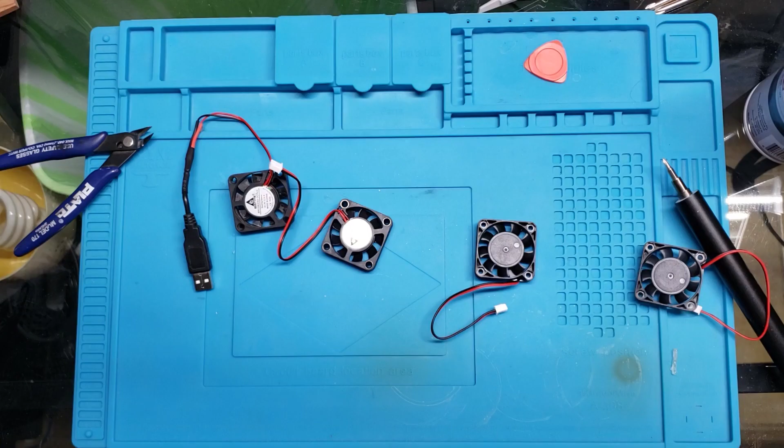So I was rummaging around in a drawer the other day and I found these fans, and I thought to myself, these would be absolutely perfect for cooling the top of my laptop. So I think if I 3D print some kind of mount for these, it would do a suitable job at reducing the temperature on that. So that's what our project will be for today.

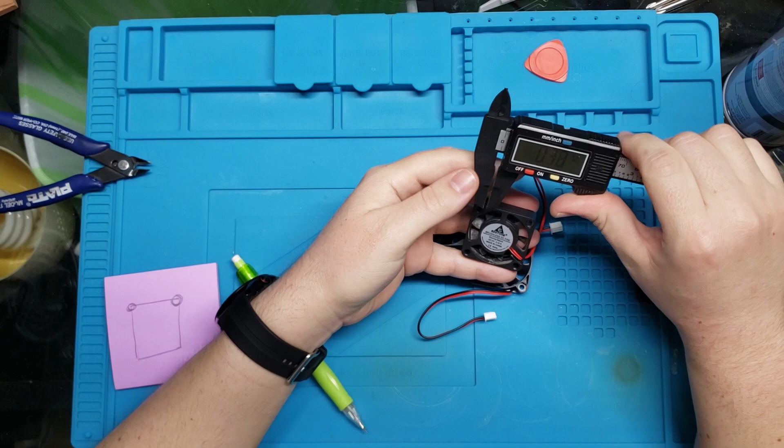Alright, so let's go ahead and start with the measurements. Width and height should be the same. We're concerned about the dimension, the size of the hole, and the distance of the two holes from each other. So, bad engineer. This is set into inches. Let's go ahead and set that to millimeters and zero that out.

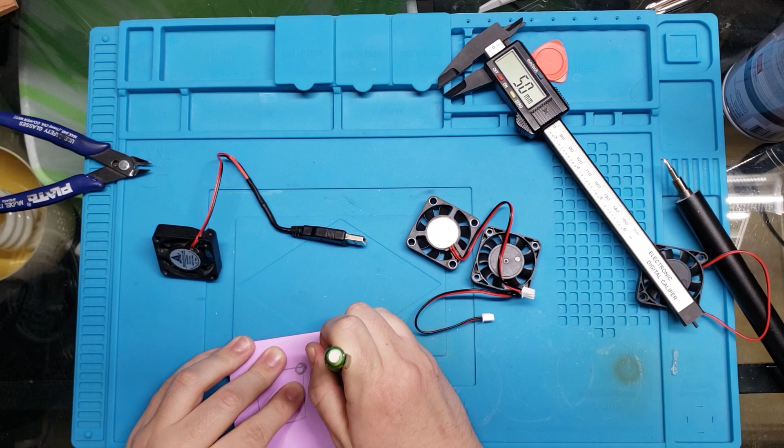See, what we can do is measure the distance from the edges of the circles, which comes out to roughly 28.3. And then we can measure the size of the circle, like so, and that comes out to roughly 3.1. I think a safe number is 28.5. 39.8, these are 40 millimeter fans. Alright, now we're ready for Fusion 360, so let's hop on over there.

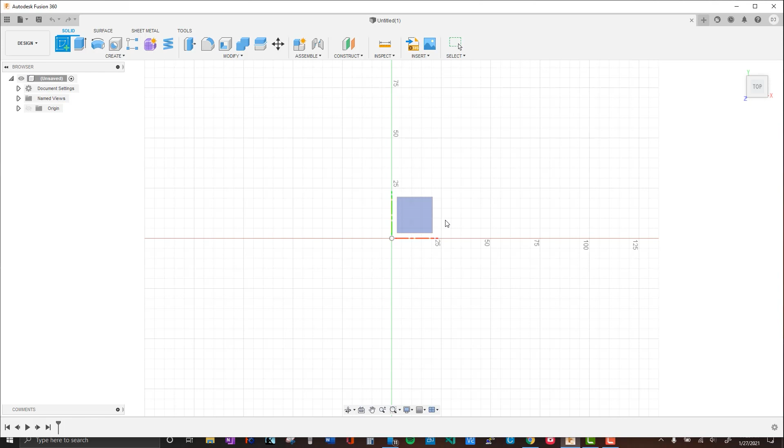We're going to get a top-down view and we're going to create a new sketch. We'll select our plane there. And now we're going to start by creating a small line connected to a larger line connected to a smaller line. This first small line will be 3.1 millimeters divided by 2. Let's zoom in a little bit.

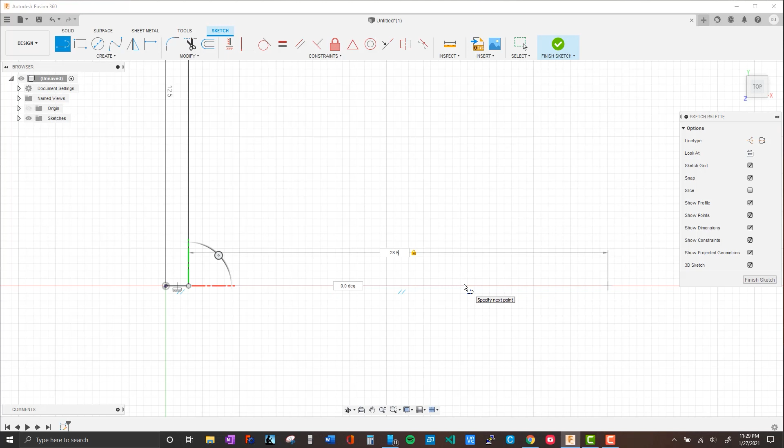Alright, now our next line will be connected to the end of that, and that will be the 28.5 millimeters we measured earlier, and then we'll repeat that same small line here. That is 3.1 divided by 2, because I'm too lazy to do math. And now we can create our circles. So, 1. The center of each circle will go at the end of all of the lines, if that makes sense. So that is our circle.

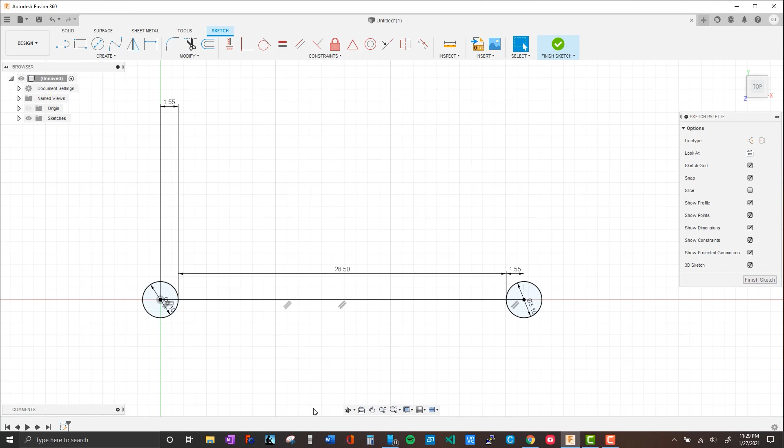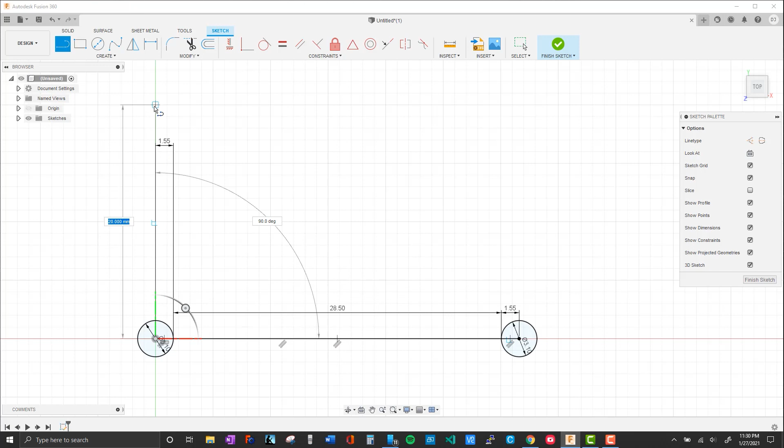We can now do the same thing in the height direction, or technically the y direction. So let's measure the overall length here, because we don't need to do that since we already have a circle here. So we'll just pretend like we're creating another line. We'll measure from one center point to another, that's 31.6, and then we'll do that in the y direction, so 31.6. And then we'll go ahead and do that again for the fourth and final circle. 31.6. Awesome.

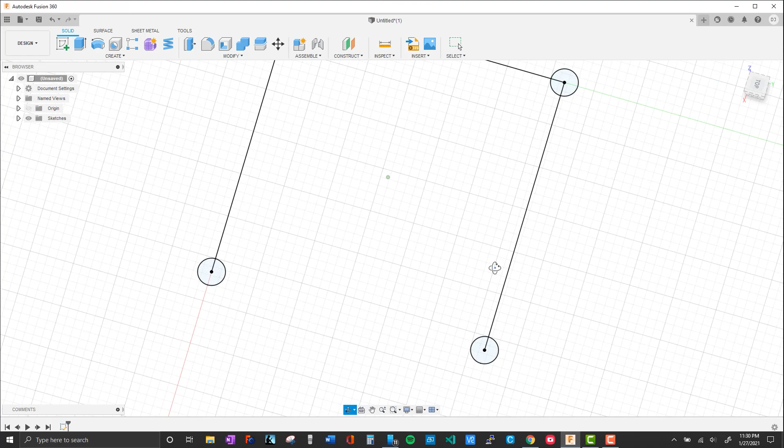So now let's create some circles there. 3.1 and 3.1. We'll hit finish sketch at this point, and we can go ahead and extrude our circles. So we'll hit E first. Now I can select all the faces that I want to extrude. And then let's just drag that up about 2 millimeters.

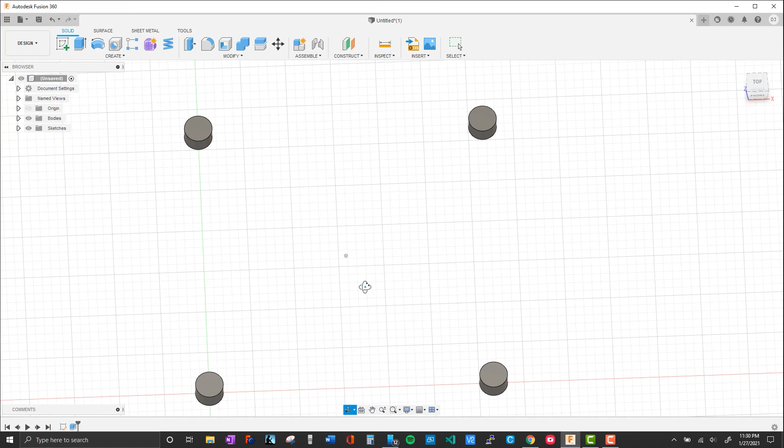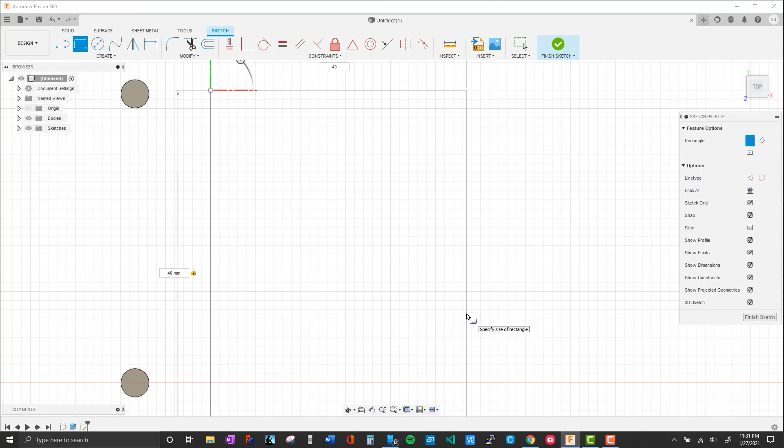Now that we have that, we're going to create a centering line, and we're going to create the outer box of the fan. So let's go ahead and go top down, create a sketch, and this sketch we're going to make a rectangle, so we can just type R and click anywhere. And then this is going to be 40 by 40, because that was the size of the fan itself. Now we'll extrude that about 1 millimeter. We just really need the dimensions to play around with spacing and stuff like that.

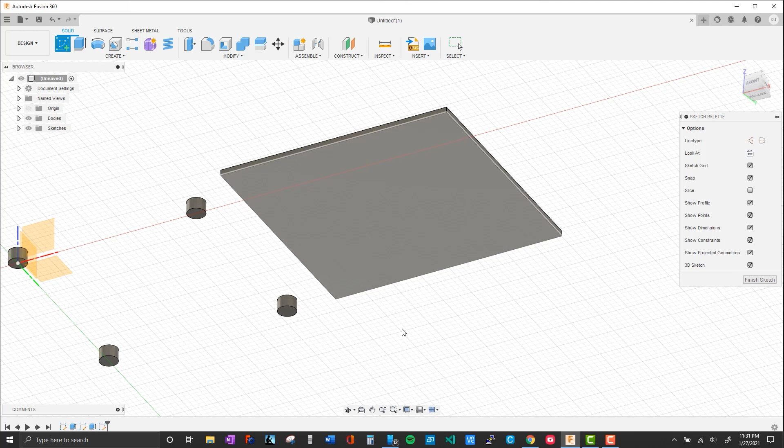So now we're going to create another sketch, and we're going to create that centering line we talked about earlier. So we'll click the bottom face here, click line, and we'll go from one corner to the other corner of the square. And then we'll do the same thing here, where we'll create a line at the center point of one circle and go to the center of the other circle.

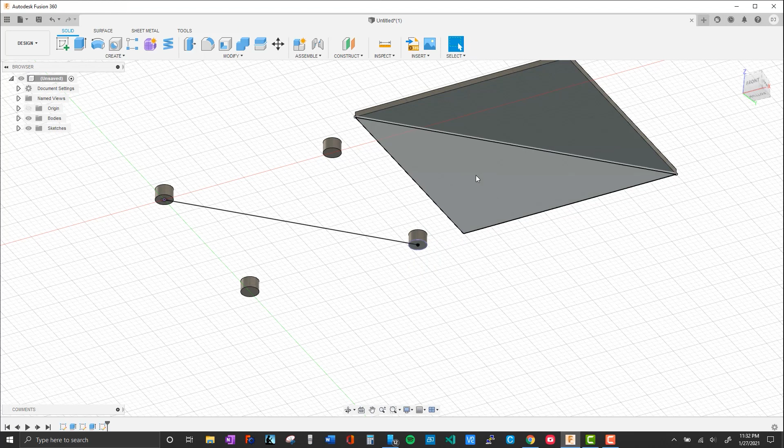So now that we have that, we hit finish sketch, and we can shift click the rectangle, type M to move it, and now we can move it by selecting the origin point, which will be this right here, which is the midpoint of this line that we drew. Move bodies, make sure that's selected, selection, there we go.

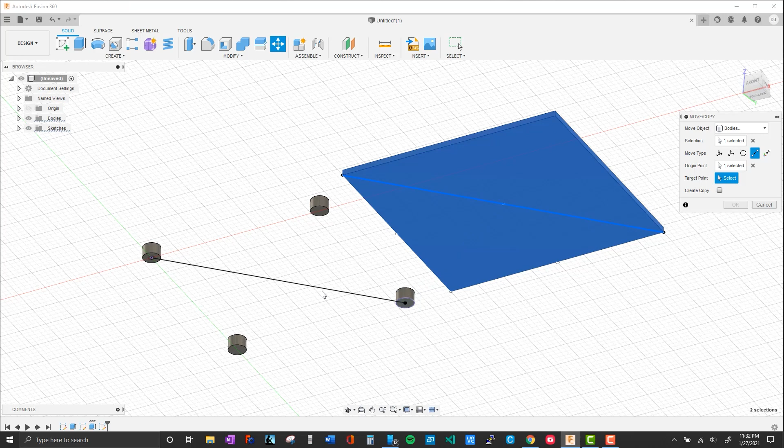Origin point, target point, which will be the center there, and now we have that perfectly centered. We hit OK, and these two we can get rid of—we don't need these sketches anymore. See this one, delete, that's okay. That one, delete, that's also okay.

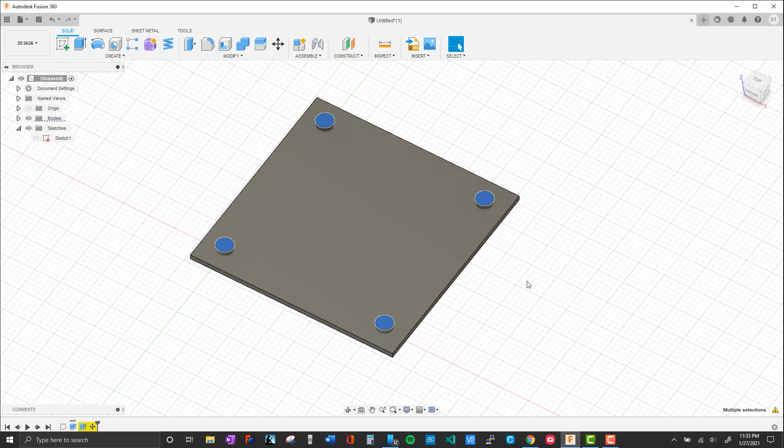So now, to finish this off, we're gonna shift click all of the faces of the circle. We're gonna press the E key and extrude down. Hit enter, and now we have the locations of the mounting holes of the fans.

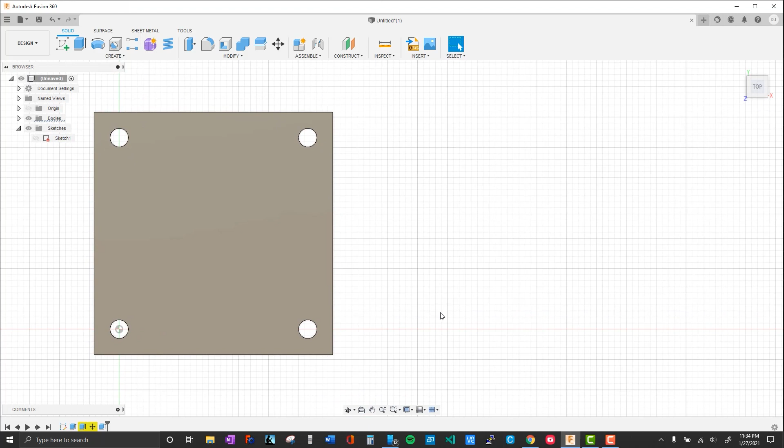Perfect. Now we can create a frame around this that'll support 4 of these evenly spaced out next to each other. To create 4 more of these and align them perfectly with each other, we're going to use a rectangular pattern. So first, just to get it off the bat, I have kind of a big laptop—it's 15.6 inches, so it'll support a lot of space.

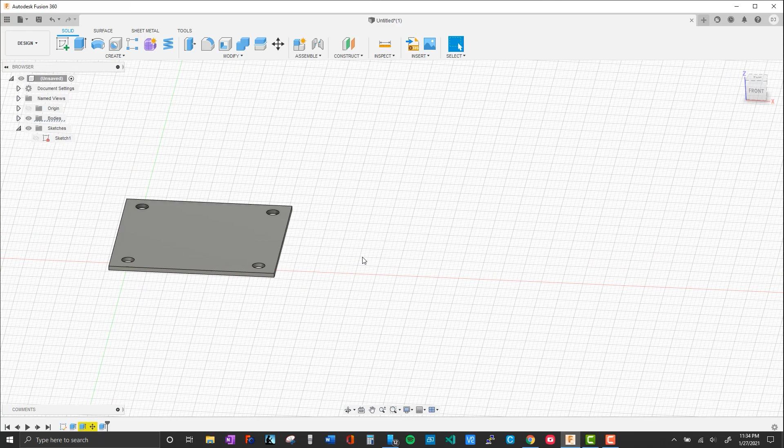Now these fans are 40 millimeters each, and if we have 4 of them, that's going to be at least 160 millimeters if we place them exactly side by side. But I want to space them out a little bit so I can distribute the cooling more evenly on my laptop. So we're going to go ahead and create a line of 200 millimeters, and that should give us about 10 millimeters of space in between each of the fans.

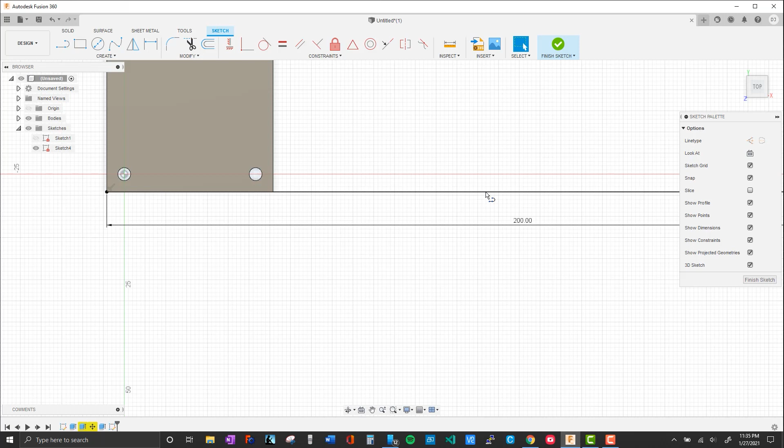So we'll start by creating a sketch here. We will select this face, the bottom face, and then we'll create a line starting at the corner of there. Let's get a top-down view. Make that easy, 0 degrees, and that's going to be 200 millimeters for my use. Now that we have that line, we can go ahead and hit finish sketch.

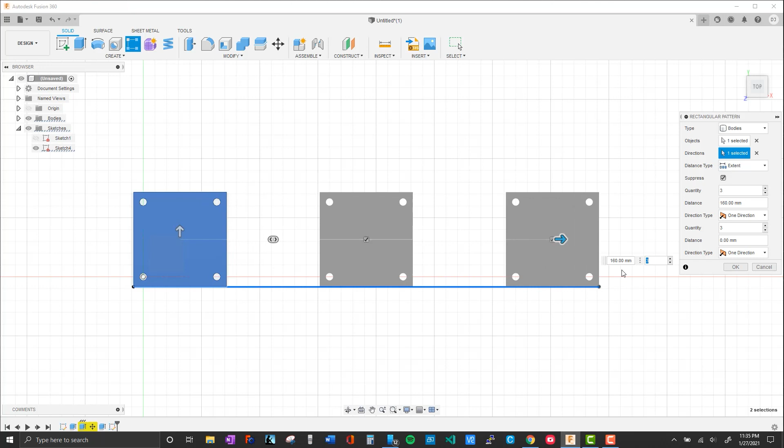Then we'll go ahead and hit create, and we're going to create a pattern, rectangular pattern. We'll select that as the body, the object. The direction here will be this line, and then now we can go ahead and just space this out. So I'll have this go all the way to the edge right here, and then we're going to up the quantity to 4, and that'll give us the desired effect.

Okay, so now we have 4 perfectly spaced fans. We just have to draw a frame in which we can screw in these fans. So let's go ahead and do that next.

Okay, so now that we have our 4 fans how we want them, we're going to go ahead and start a sketch and create a rectangle. This rectangle, we're going to start from the top left corner and go down a little bit to the right. I eyeballed it and I made it about 8 millimeters in terms of thickness, so I had roughly 3 millimeters of space in between each circle's edge, and that should be enough space so that I don't have any problems, any breakage or anything like that.

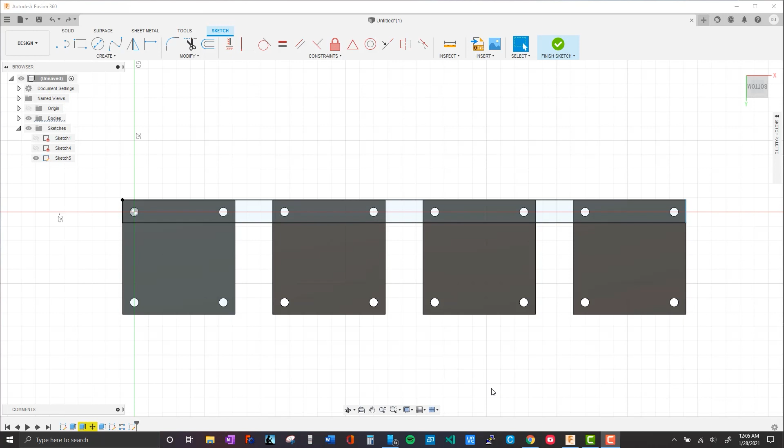Now that this is set up, we're going to create some circles, and these circles are going to be at the center points of each of the mounting holes. The only catch here is we're going to make them 3 millimeters in size, because the screws that I'm working with mount at 3 millimeters.

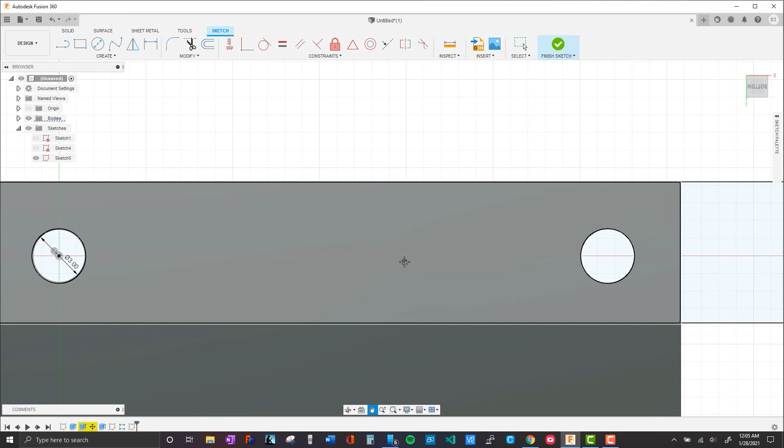I played around with a few different sizes before. It didn't really work out. I had to drill, and some were too big, so 3 millimeters is the magic number for the screws that I have. Let's go ahead and create a couple more of them.

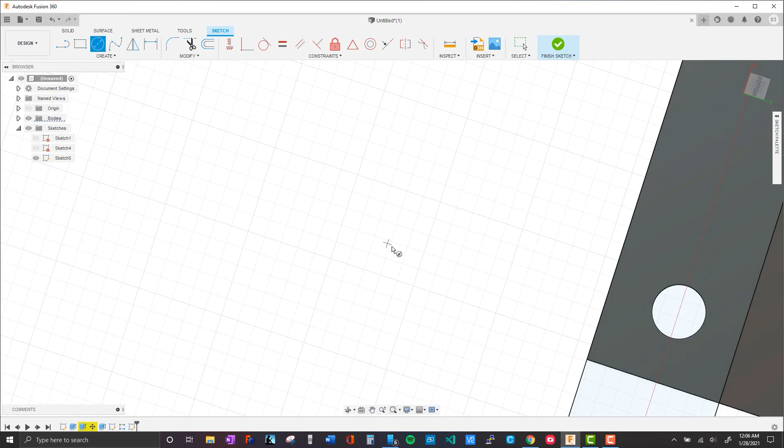Sometimes in Fusion you have a little bit of a hard time getting a center point. If you hover around, you won't always find your center point, and you can click, and even though it shows you place center point, it won't place it in the right point. So you can actually just change the aspect a little bit, because there's 2 circles on top of each other, and I think Fusion has a hard time interpreting which one you want to click on. So if you change the angle, you can often get to the one that you're looking to manipulate.

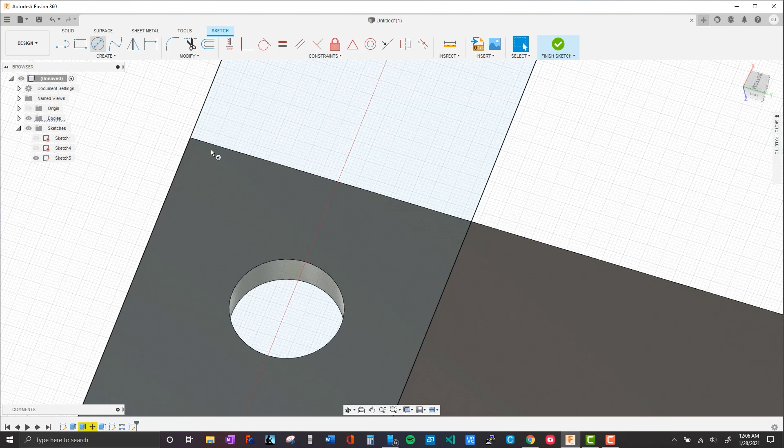So 3 millimeters there, and do this a couple more times. I'm sure there's more efficient ways to do this, but as long as I get it done, I'm happy. If anybody finds a smarter way, please leave it in the comments.

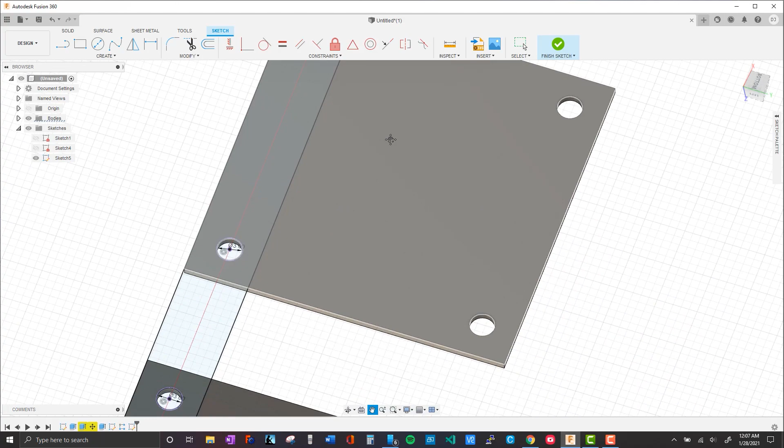Almost there, 2 more. 3. Alright, so now that we have that, we're going to turn off the bodies over here so we just get our sketch—and that's exactly what we want.

So now we'll go ahead and extrude that. Shift click that. Now we'll extrude it, and we have to consider the length of the screws, and I don't want the screws to protrude past this. I want this surface to be flush so I can lay it on my laptop and not be concerned with any scratching.

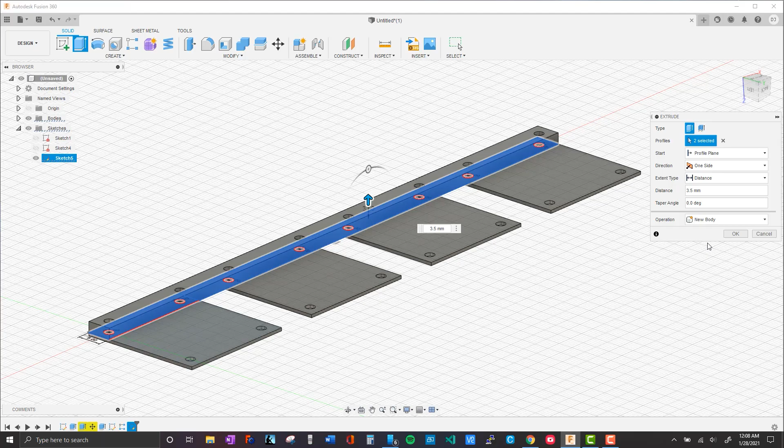So instead of making it 3mm, we're just going to go a little bit extra and make it 3.5mm, or 3.25 if you want to save some plastic and time printing. And then here, instead of joining, we're going to create a new body from that. We hit OK, and awesome. Now we have the first mounting portion here.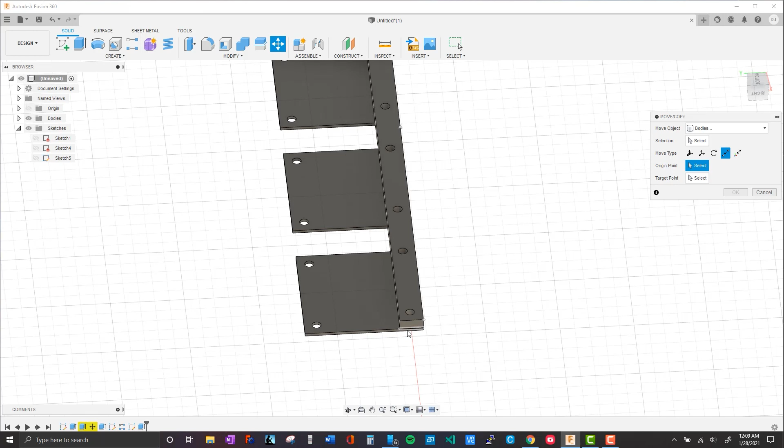Now, take into consideration, if you want, you could take another one of these, like we would copy this. Let's go ahead and do that. Move, because we have to do that anyways. So we will select bodies, selection, origin point. We want to select, this is our origin point and our target point there.

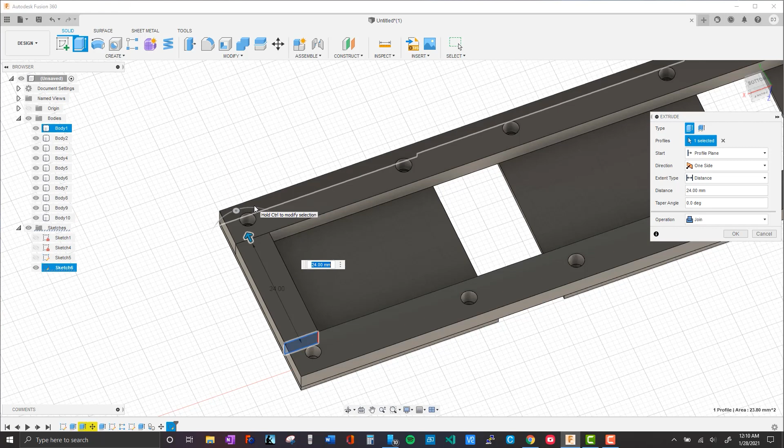And if you want, you can create a connection point between here and here, but at the same time, us screwing all the fans in at those anchor points, all that mounting, is kind of pointless. And considering the fact that it's just going to sit on a laptop, not do anything, I'm not really too worried about it. So I am not going to do that, and I'm going to leave it right there. And that looks pretty nice.

Now, the next thing we have to account for are the electronics. I'm not really going to do anything fancy in terms of electronics. I'm just going to wire all the fans together to a central point and then maybe connect them to an on-off switch, and then from there a USB cable that I can plug into.

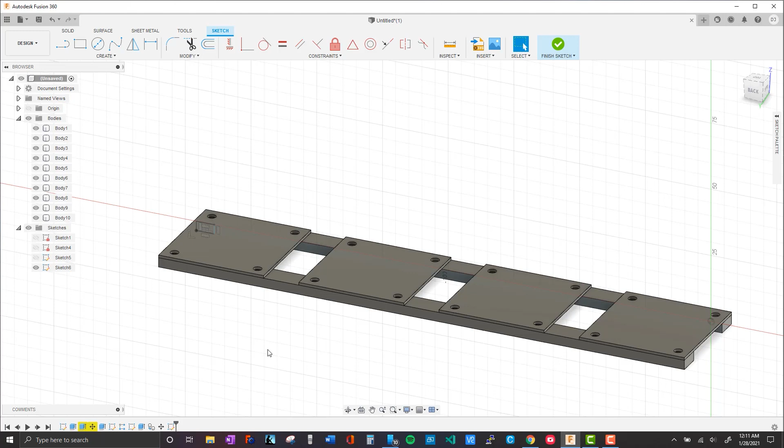Alright, so I mentioned some electronics earlier. I just want a basic on-off switch so I don't have to unplug the fans every time, and it's roughly the same width as the fan itself, so I feel like I might be able to work this in and still keep that nice flush profile going on.

So yeah, back to Fusion 360. Alright, so we're going to build a little electronics box where we can route all the wires for the fan, mount the switch, and put a little USB port on there so that we can plug common cables into it. Since I worked on this already and I lost a little bit of some footage, we're going to step through what I had worked through, and yeah, we'll do it that way.

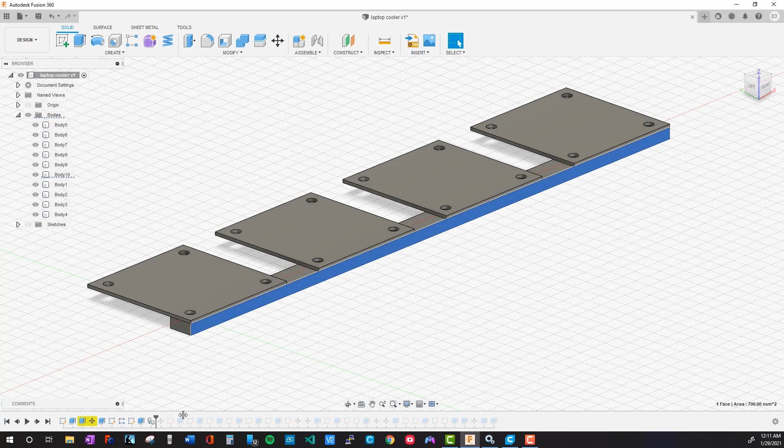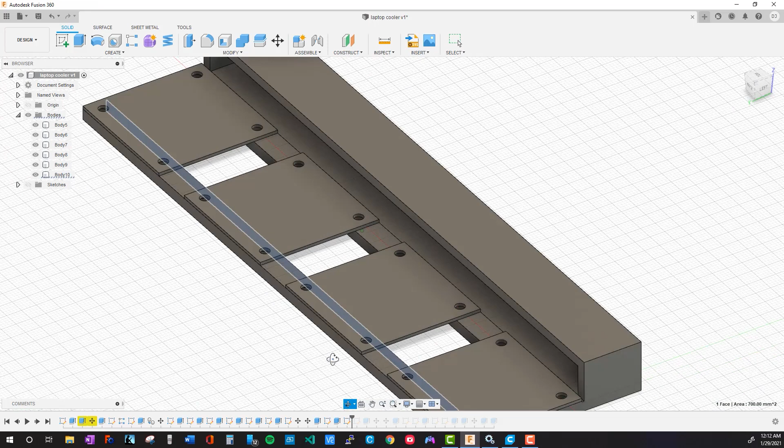So we'll start by extruding this a little bit. It's going to be about 20 or so millimeters, and it's just to accommodate the depth of the switch that we're using. So there's the extrude, and then we'll create a wall, and create another wall, create another wall, and then we're going to create a cutout for the switch itself. So there's the cutout for the switch, and then we have to make a cap for this because we don't want those wires to be exposed. We want to be able to grab something.

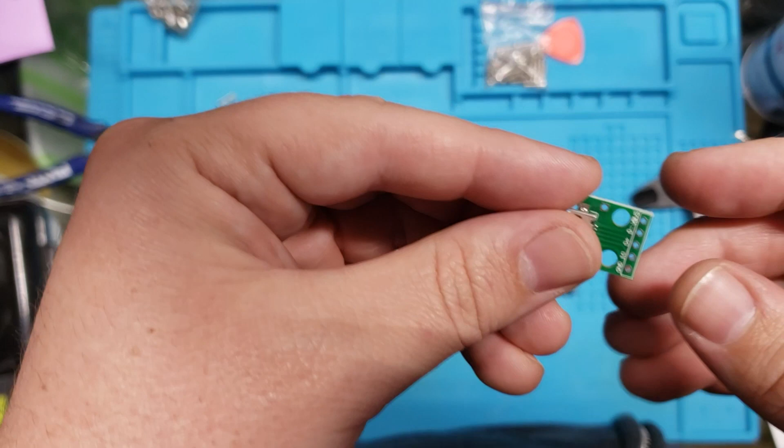So now we have to make an opening for the USB port. Okay, so I have these little USB breakout boards, and these are awesome. I keep these on hand because they break out the power and the ground from any USB cable and give you access to an instant 5-volt power supply. These are awesome to have.

What we're going to do is we'll take this, we will wire it to this switch over here, and then we will wire that to all of the fans, and we'll have a nice on-off switch on the side so we can press the unit with one hand. We'll push the back side of the fans, apply pressure like so, and yeah, so let's get back to Fusion.

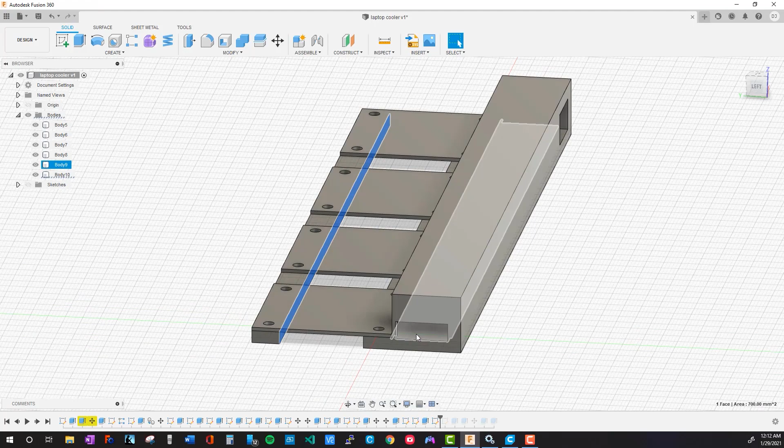And that's where the opening will be for the USB port. You can put it on either side, whichever's convenient for you. Just note that if you do put it on the other side, you would have to move this switch location down. You know, basically just accommodate your changes.

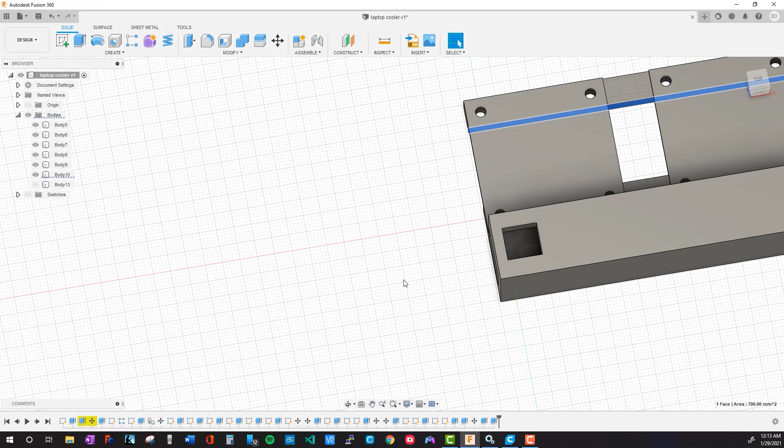So yeah, now that we have that, we're going to add an access port on the top because we have to screw mount the USB port into place. So we have to get access in there with a screwdriver one way or another. So we can just put a box here and that'll suffice. I think I might move this or widen this up a little bit. That's good. Do the same thing in the other direction.

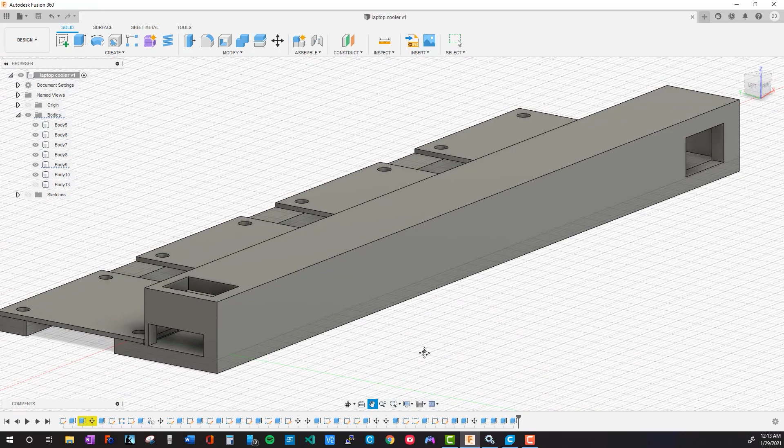Now we can hit Control S, save, although I should have been doing that this whole time. And now we have a product that will hopefully work as expected.

So let's export this. I'm going to unclick all the unnecessary bodies, so that way we know what we're working with. Body 10 and 9 are what we care about.

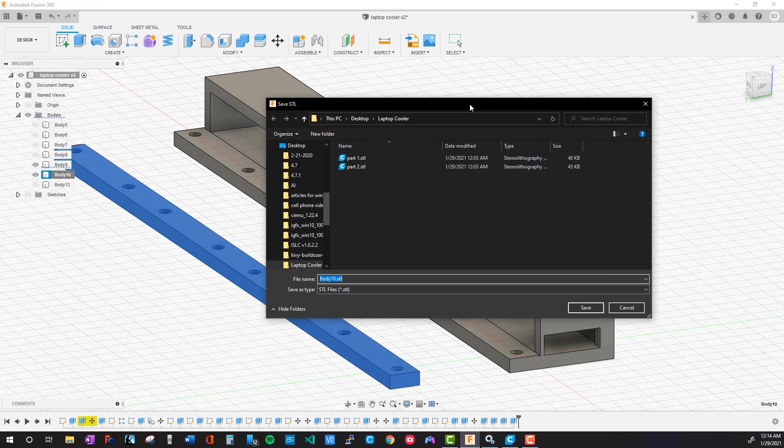And then we'll right click that, and then we'll just hit save as STL. Then hit OK. I have some previous parts that I did and wanted to make changes to, so we'll just save it as those instead. This will be saved as part 2. I click save as STL, okay, and part 2. That's quite fine.

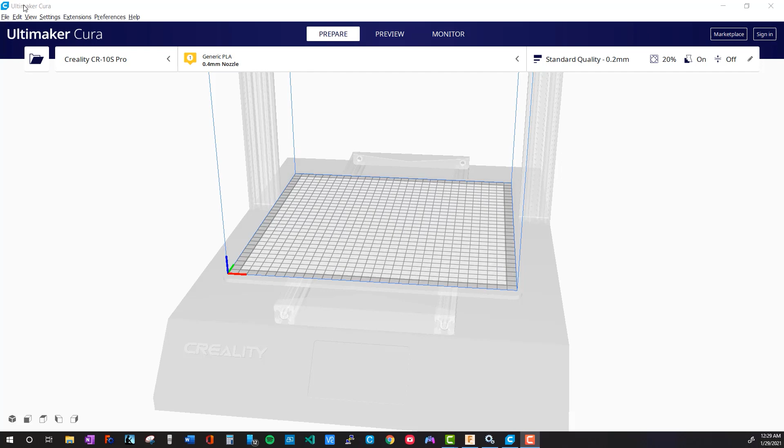Control save and minimize this. And now we're going to go to Cura. We'll just open the files and arrange them so that we have an optimal print. Now for me, I'm going to go ahead and rotate these.

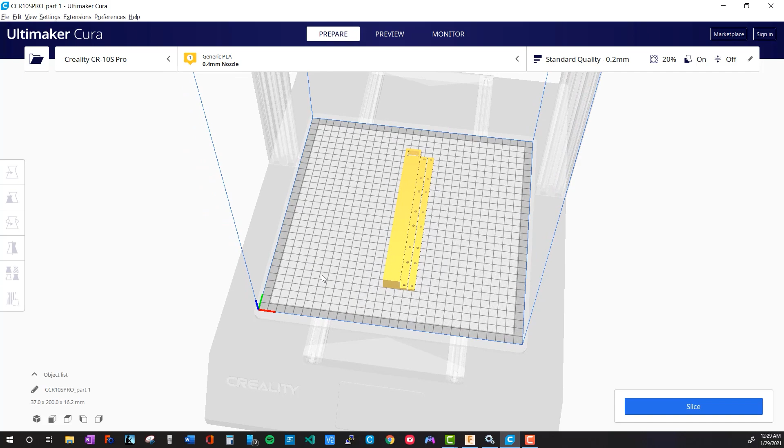Alright, awesome. One last thing is, I don't want to print this like so. I want this face here to be aligned to the bottom. So we'll go ahead and click align face to plate.

Hold Control A, and we'll arrange all models. And we'll take this one and move it just a little bit.

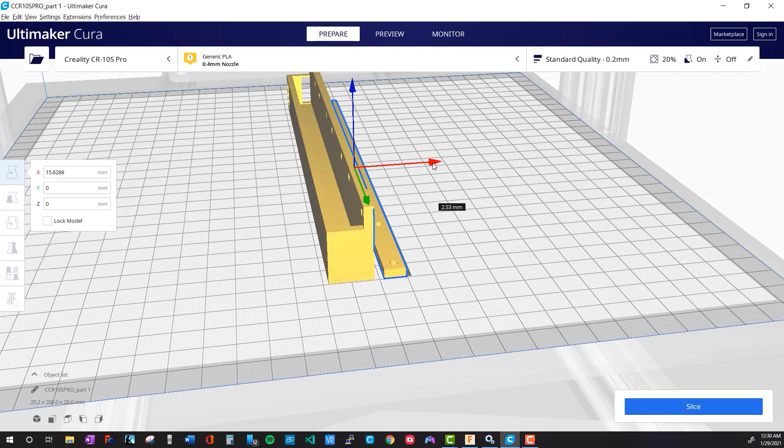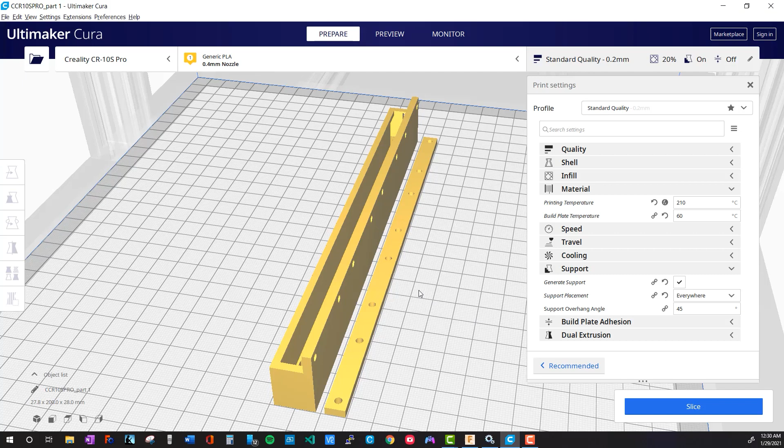Alright, let's go. So we'll check our settings. Printing temperature, build plate temp looks good. We are generating support. It's placing it everywhere, which we kind of have to be conscious of because we don't need support in the holes here, here, and all the way through here. So we can go ahead and fix that by selecting the model, clicking this icon right here.

So let me go ahead and rearrange the view. And we're just going to click where the holes are at, and we're telling Cura where not to place supports. Awesome, so that looks great.

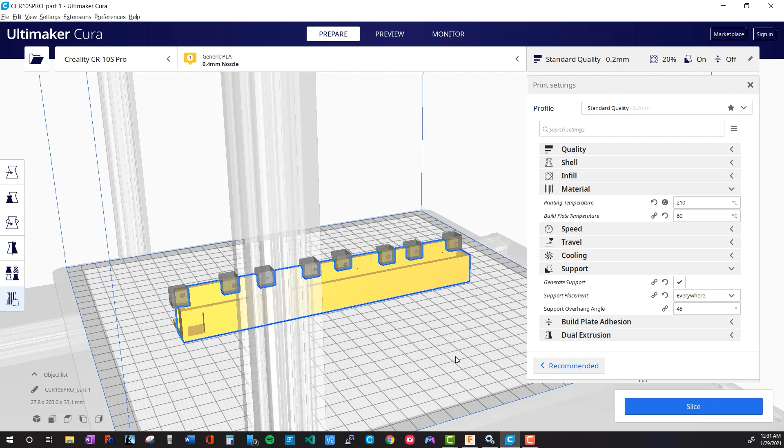Let's go ahead and slice it. But remember to preview your slice before you save it, because you can catch any weird stuff that will happen. As we can see, there are no supports in these holes, and there are supports in the rectangular cutouts, which we will need support for. Awesome, so that looks good.

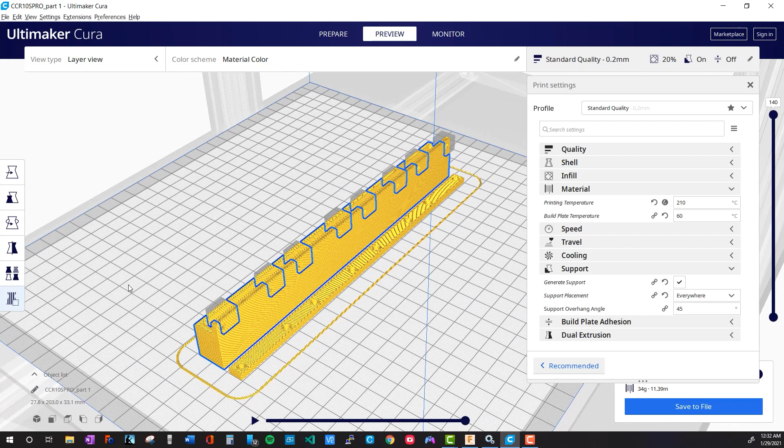Let's go ahead and take this to the 3D printer. We close this, save to file. Overwrite this that I had here, and save. Yes, awesome.

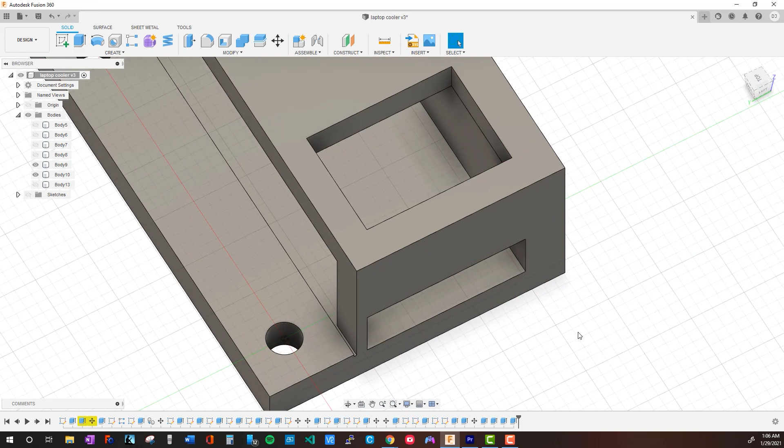So one thing I realized after I exported all that stuff into Cura was that these edges are sharp. So for something more than just an aesthetic purpose, we're going to apply some fillets to this. So I'll go ahead and do that.

Ta-da! So yeah, those fillets will save your hands. Let me get a few here. 0.5 looks better there.

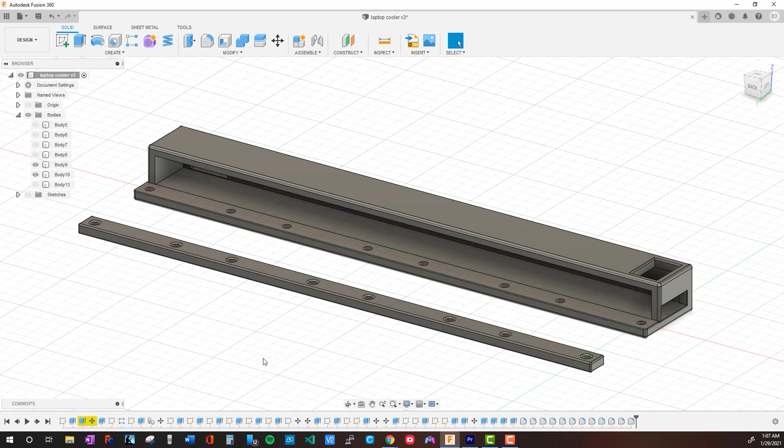Awesome. Now I just have to re-export this and we'll get this onto the printer.

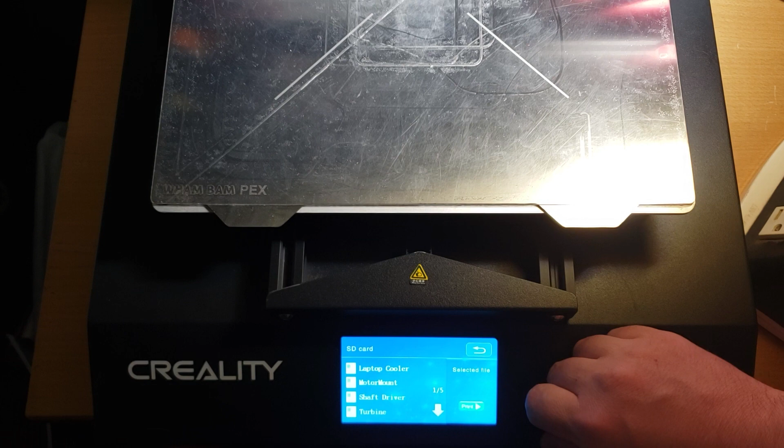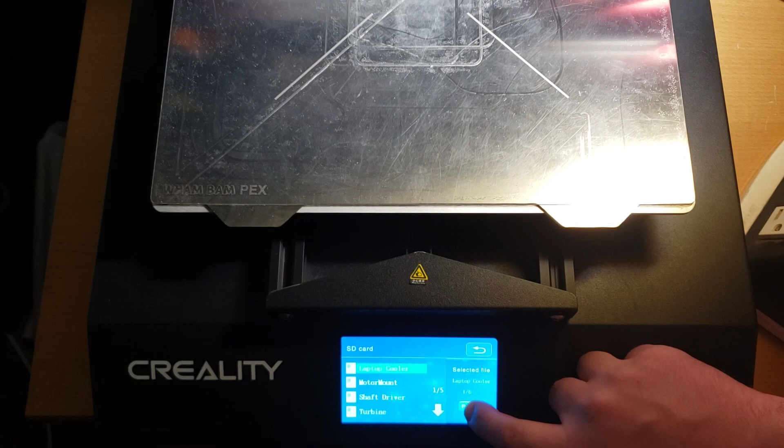You know, I could do it this way, but I kind of like going and setting the temp manually because it allows both units, the hotbed and the nozzle, to get up to temp at the same time, which reduces the amount of time we have to wait to get to the print. So we'll go ahead and hit print and laptop cooler. Print, great. Now we just wait for that and we'll have a nice time lapse.

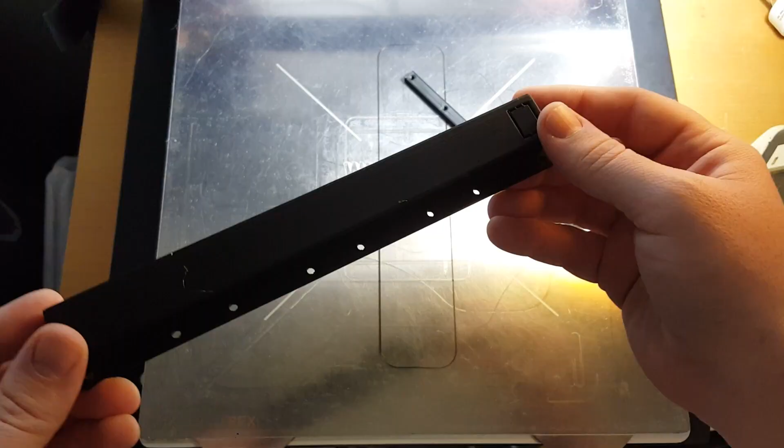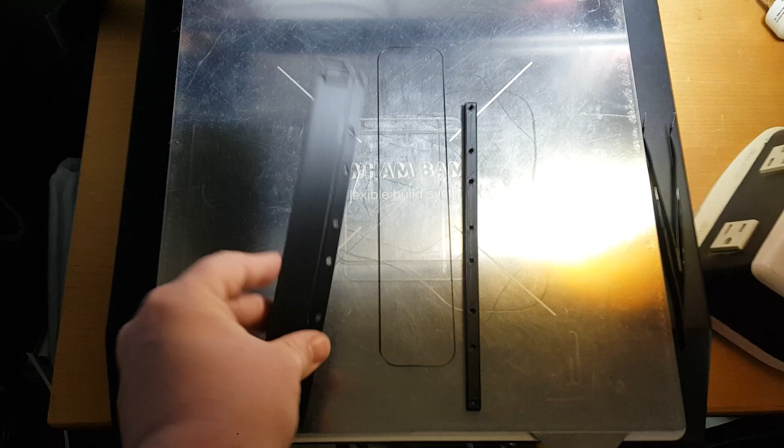Alright, so it's time for my favorite part, assembly. We're going to go ahead and pop these little notches out here and here. We're going to put our switch in there, attach a wire to the switch. We'll end up soldering all that in place. And yeah, so let's start doing that.

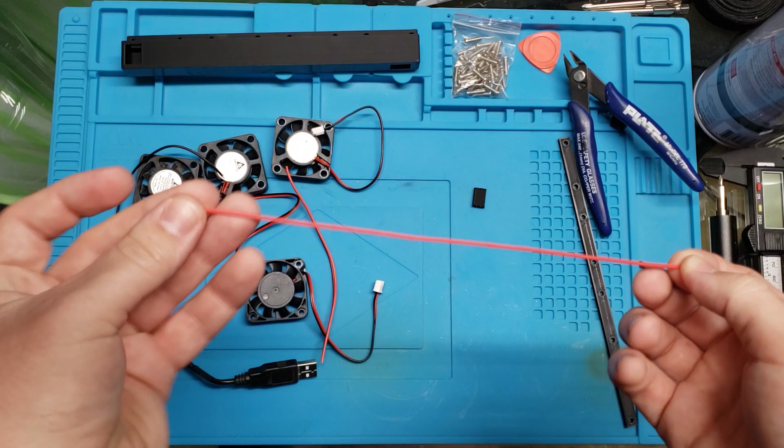We're going to take our red, strip it from the black, and attach it to one end of the switch, and then the other end to the USB part here. So voltage bus to there.

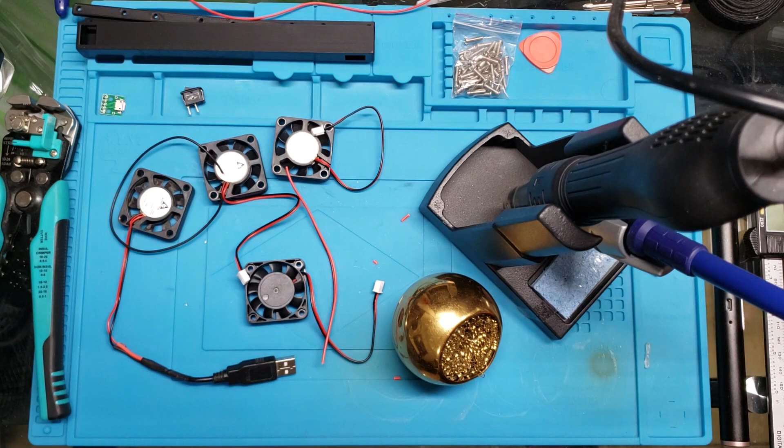Sorry if the lights flicker a little bit. It tends to happen when my soldering station is on.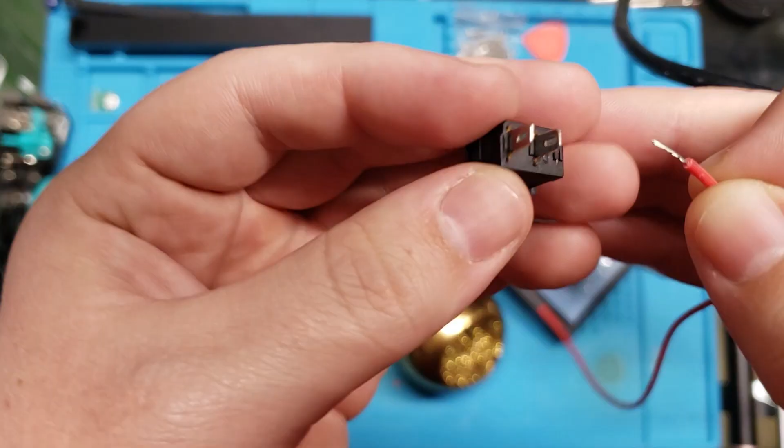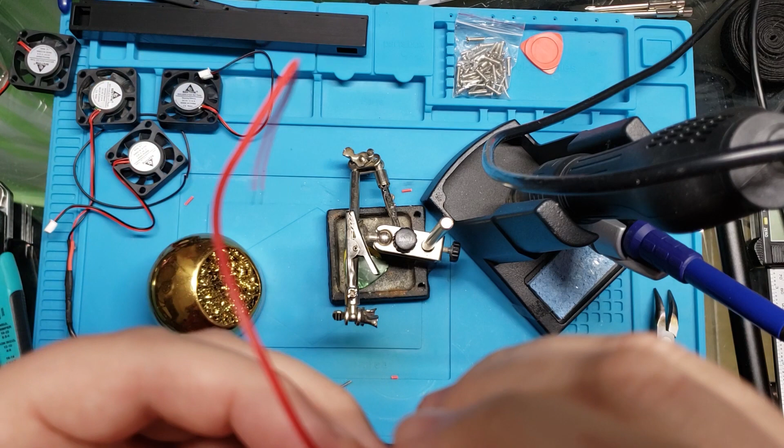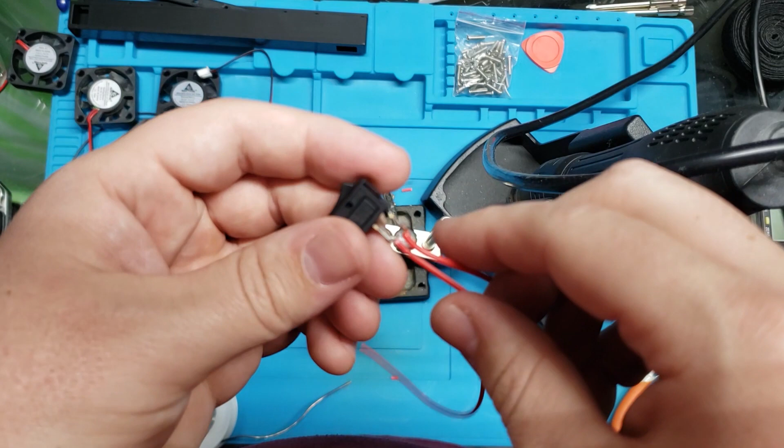These are hands down my favorite type of wire strippers. I discovered these one day, probably like 9 months ago, and I saw them online, and I ordered them out of curiosity. I got them for like $11 in China, because I couldn't get them anywhere locally, and they were awesome. I don't have to touch that tension screw or anything like that. It adjusts, self-adjusting. It works really well. I absolutely love it. It's the best invention since the wire strippers themselves.

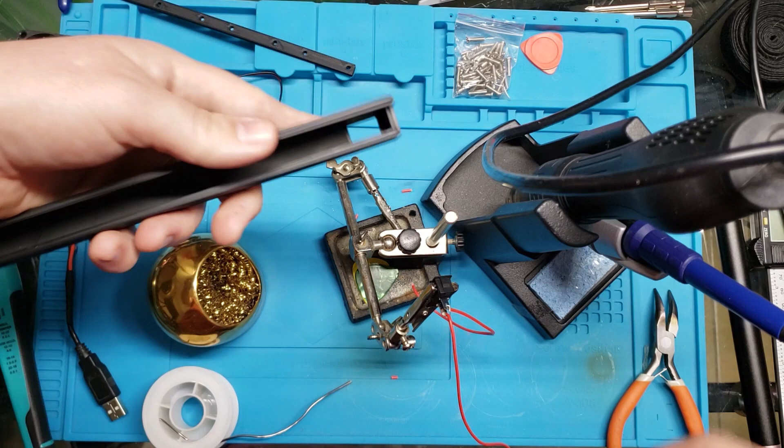So what I'm doing right now is attaching the wires that will get power from the USB port, and I'm soldering those onto the switch. The other stuff I will solder as well, but I'm going to do the fans last, because the switch I have to get in place first, and because of the access and trying to work inside a narrow space like that, I don't want to risk burning the plastic shell or anything.

I've done that before. Almost up to temp, and we are up to temp. Soldering skills are a little shoddy right now because I'm trying to work through a camera. I'm trying to multitask, but this should be sufficient. Pop this out, look at our switch.

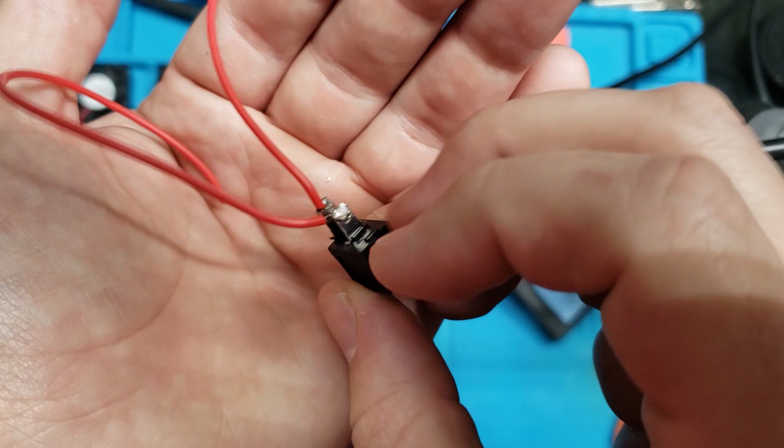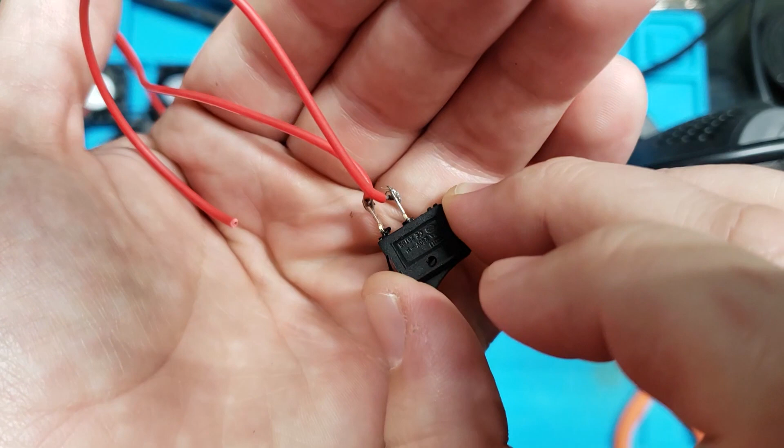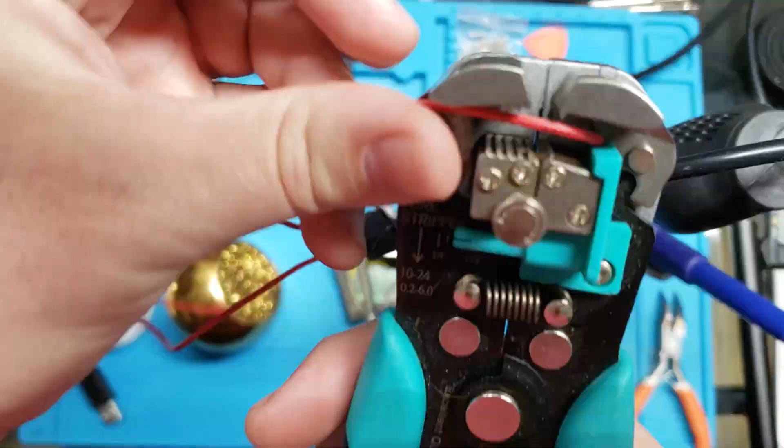Okay, so they look a little dirty because of the solder that I use. It's a low-grade solder. So you'll see some of the fluxy kind of stuff go to the top, but if you see some shiny specks amongst the stuff that goes to the top, then it's a good solder joint for this material. Usually you want to see a full shiny coat on there, but you'll get some kind of slag-like substance on the top. So yeah, this should be sufficient. That seems good.

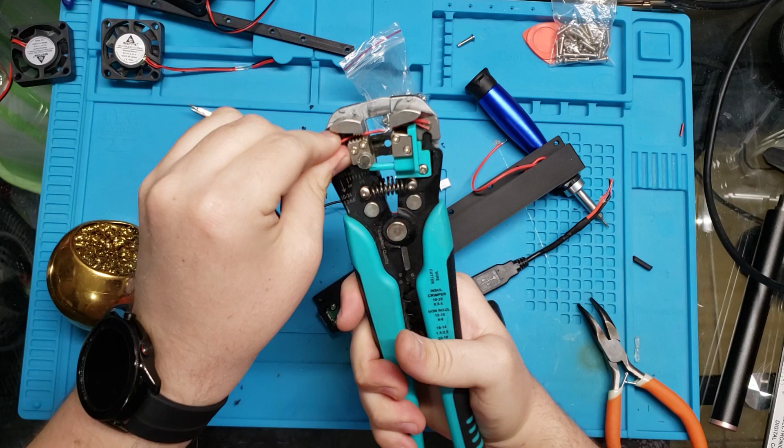Not only is this tool incredibly fast and easy to use, it is actually better for the connections that you're working with, because you don't place stress on connections. Let's say theoretically you had to cut and strip a wire somewhere down here. When you grab with your wire strippers and you grab with your thumb and you twist and you pull like that, your thumb doesn't have enough strength to hold the wire back, so at times you're pulling on this connection here. Since these grab from one end and the other end, they remove the chance of that kind

of stress happening. Now, sure, you could have a second set of pliers handy that you can hold the wire with, but now you've got pliers to hold and you have a wire stripper to work with, and the constant moving back and forth, it's annoying to work with.

As you guys can see, I am very fond of my wire strippers. I like my green color. I feel like it matches my mat.

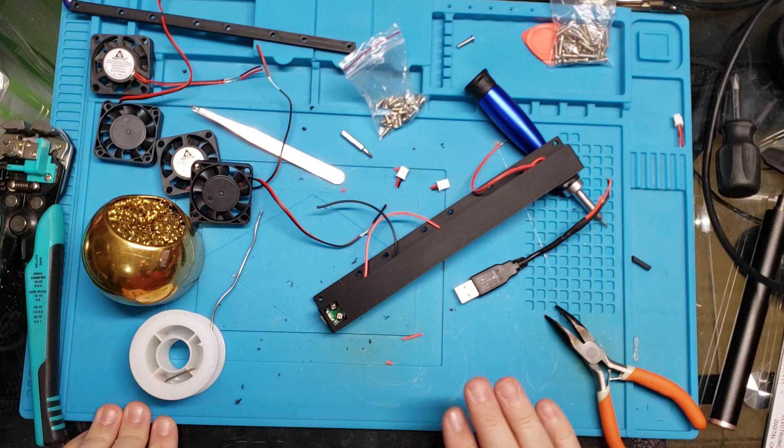Alright, so now that those are all stripped, let's wire them together.

Sorry about the camera stability. They're doing some construction in my house, and you can hear it and kind of feel it too. My camera mount is attached to the wall, and I feel like the vibration of their hammers and tools is being passed through them. So yeah, I'm sorry if it's a little hard to see what's going on at times.

Cool, now everything's soldered. We can go ahead and assemble everything. I almost forgot. We need to clean these joints up. I like my hot air gun, but it always makes my lights flicker.

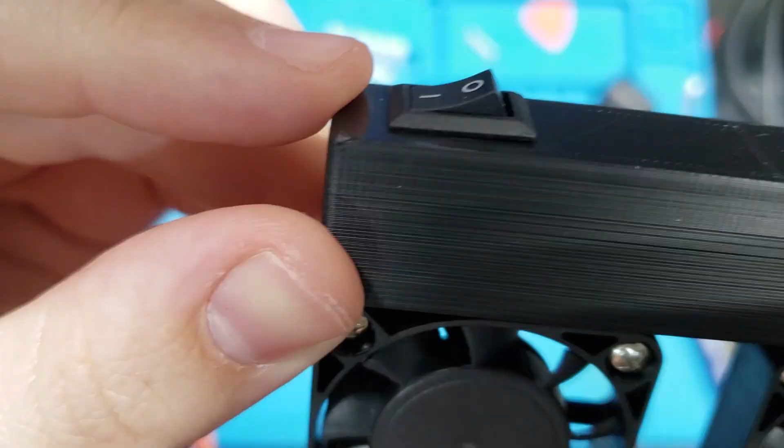...is our switch there. Nice and smooth. There are no sharp edges. There's our switch, and there is our USB port. So let's test it out. Let's see if the thing even works. Awesome! Switch works as expected. Ooh, that's a lot of airflow.

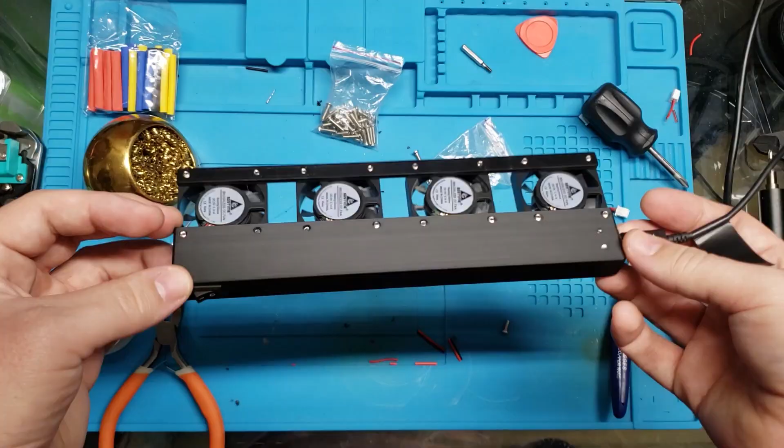Alright, awesome. Now we have to test the results of it working. Does it work well on my laptop? Will it help keep it cooler? 105, 106, 109. Are we gonna hit 110? Let's see. Towards the side, we get 104, 102. Right here's 102. We hit 110.

So this center spot right here, we get a lot of heat going on. So ideally, these fans, if we put them in that spot, that should be the best spot. Our keyboard does get a little bit warm. It gets around 100, 104. Right now it's 99 because I had the fans on them. But in terms of hottest spots, I think this is going to be the hottest. We've got 112 right here.

Now if we put our fans on them, do a quick sweep through. So our temperature drops. We've got 98. I'm gonna go in between the fans right here. 88, 89. Back to the side, we're at 103. Sweeping, still 103.4. And yeah, so that hot spot is primarily underneath this fan.

We give it a few minutes, maybe even just 30 seconds. We can see the temperature is actually going down. So it was 103.4 just a few moments ago. Now it's 102.3 around the sides of the fan. So the heat is starting to be distributed amongst the entirety of here, and I feel like that hot spot that was underneath this fan here is going to disappear, and the area around here is going to climb a little bit because that heat is going to creep.